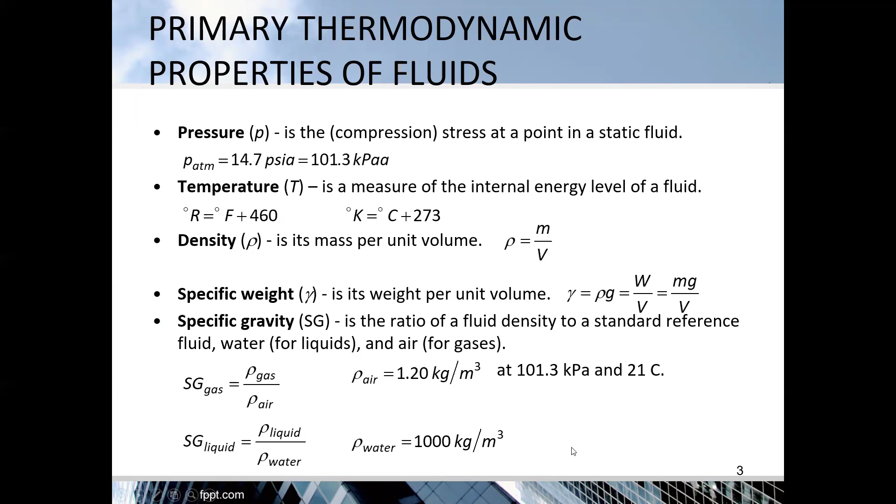Or, using gamma instead, gamma liquid over gamma water. Gamma water is 9810 Newton per cubic meter, or 62.4 pounds per cubic foot.

Sample number 1. At sea level, G is 32.2 feet per second squared. Find the specific weight in pounds per cubic foot of a liquid with a density of 65.5 pound-mass per cubic foot. Solution: gamma equals rho times G, that is, density in pounds per cubic foot, times G, over GC.

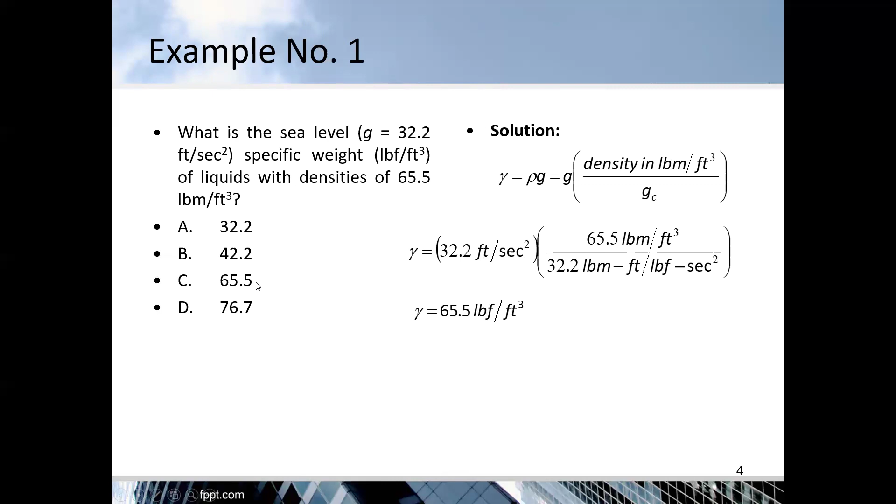Next, viscosity — this is review. Absolute or dynamic viscosity is the viscosity determined by direct measurement of shear resistance, in poise or centipoise. Units: 1 reyn is 1 pound-second per square inch.

1 poise is 1 dyne-second per square centimeter, or 0.1 Pascal-second. 1 centipoise, the common unit CP, is equal to 0.01 poise.

Kinematic viscosity is the absolute viscosity of a fluid divided by its density, in stoke or centistoke. Units are square feet per second, square meter per second; 1 stoke equals 1 square centimeter per second, or 0.0001 square meter per second.

1 centistoke, symbol cSt — small c, capital S — is equal to 0.01 stoke.

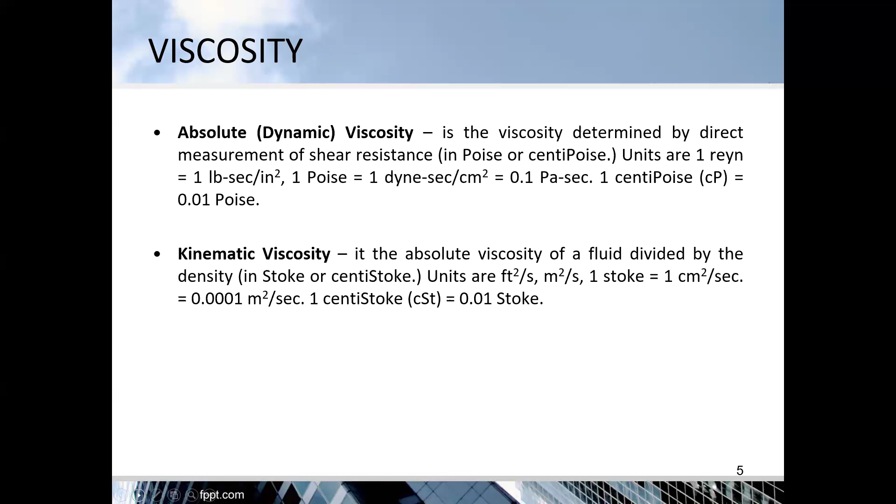Sample number 2: An oil has a kinematic viscosity of 1.25 times 10 to the negative 4 meters squared per second, and a specific gravity of 0.8. What is its dynamic, or absolute, viscosity in kilogram-meter-second units? So, kinematic viscosity is 1.25 times 10 to the negative 4 meters squared per second.

Required is the absolute viscosity, symbol mu. Mu equals rho times nu (the kinematic viscosity). You need the specific gravity, so density equals SG times rho of water. Thus mu equals SG times rho water times nu. That's nu, the kinematic viscosity symbol, distinct from mu, the absolute viscosity symbol.

So, mu is equal to 0.8 times 1,000 times 1.25 times 10 negative 4, or 0.1 kilogram per meter second.

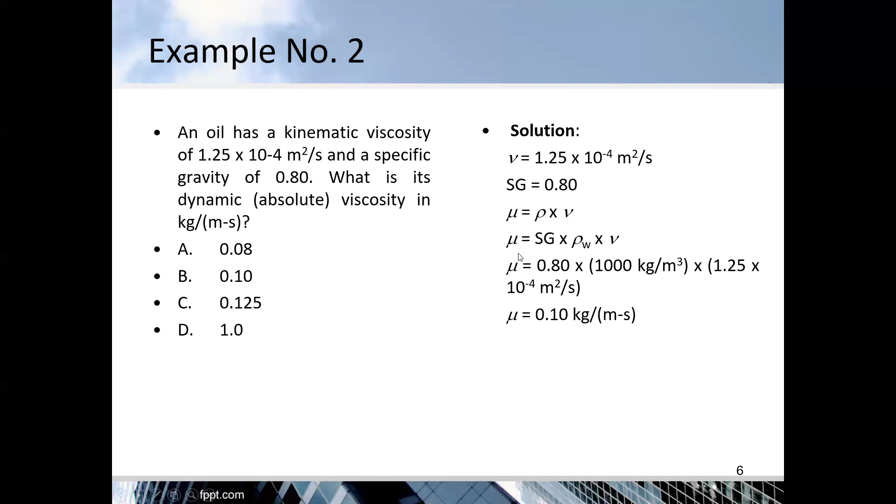Next is the Reynolds number. Reynolds number is a dimensionless number which is the ratio of forces of inertia to viscous forces of the fluid. It is the primary parameter correlating the viscous behavior of all Newtonian fluids. So Reynolds number is the forces of inertia divided by the viscous forces, or dV rho over mu, where R is the Reynolds number, dimensionless. D is the inside diameter in meters, V is velocity, nu is kinematic viscosity in meters squared per second, and mu is the absolute viscosity in Pascal second.

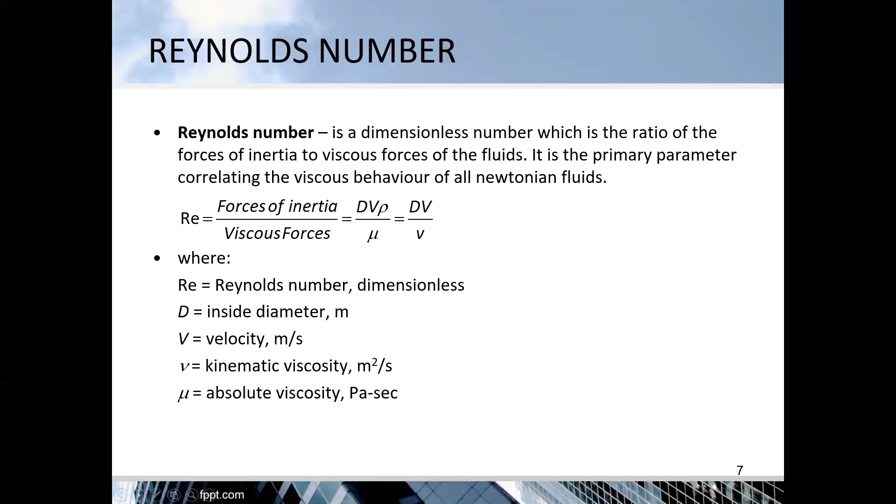So we get 1,000 times 2 times 12 over 39.37, times 11 over 1.131, equals 5930, letter B. Here 1,000 is the density, 11 is the velocity in meters per second.

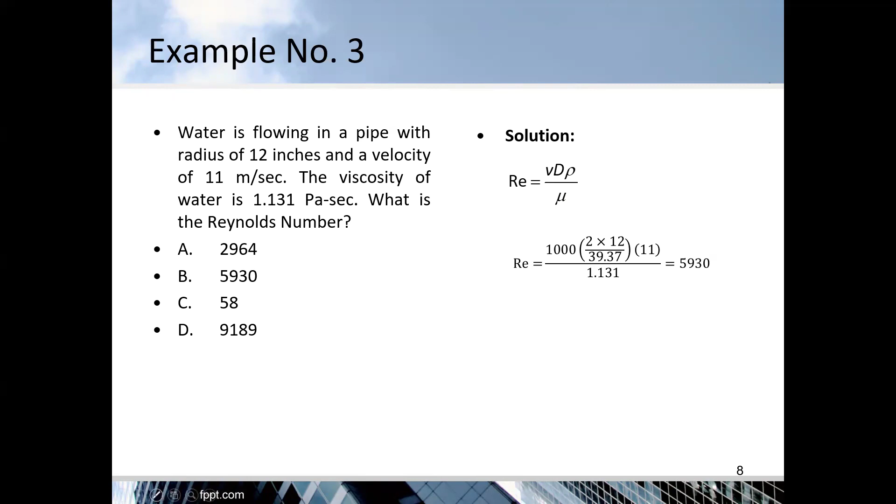So, hydrostatic pressure. Hydrostatic pressure is the pressure of fluid exerted on the walls of a container. Pressure is equal to weight density times height: P equals gamma h or rho g h. Pressure head is h, the height, which equals P over gamma or P over rho g. That's shown in the figure, where P is the hydrostatic pressure, gauge pressure, not absolute.

h is the height of fluid, the pressure head. Rho is the density of liquid. At the bottom, you have gamma of water times h. If it's water, at the top the pressure is 0 since h is 0. If absolute, you add atmospheric pressure.

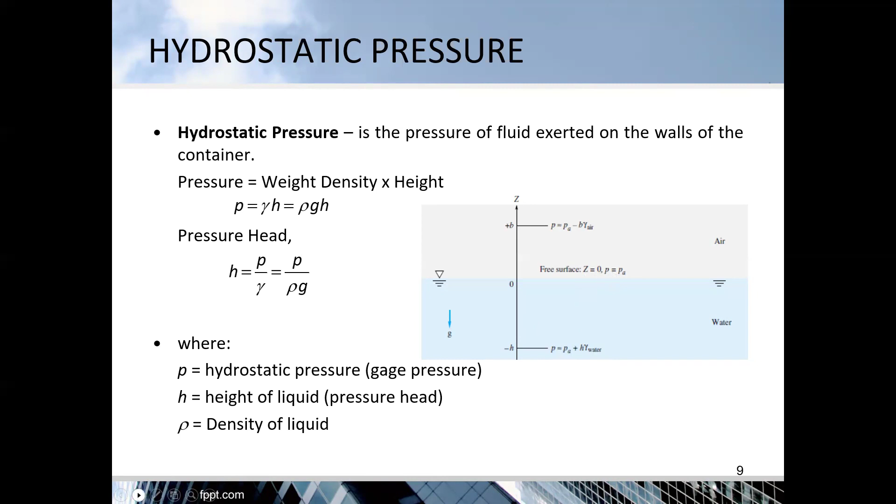Sample number 4: On a sea level standard day, a pressure gauge moored below the surface of the ocean, with specific gravity 1.025, reads an absolute pressure of 1.4 megapascal. How deep is the instrument?

P absolute minus P atmospheric equals rho g h, equals gamma h, equals SG times gamma water times h, because it's in the ocean.

The reading given is absolute, so 1.4 megapascal is 1,400 kilopascal minus atmospheric, which is 101.325 since that's the gauge pressure. So it becomes 1.025 times 9.81 times h. Solving, h is equal to 129 meters.

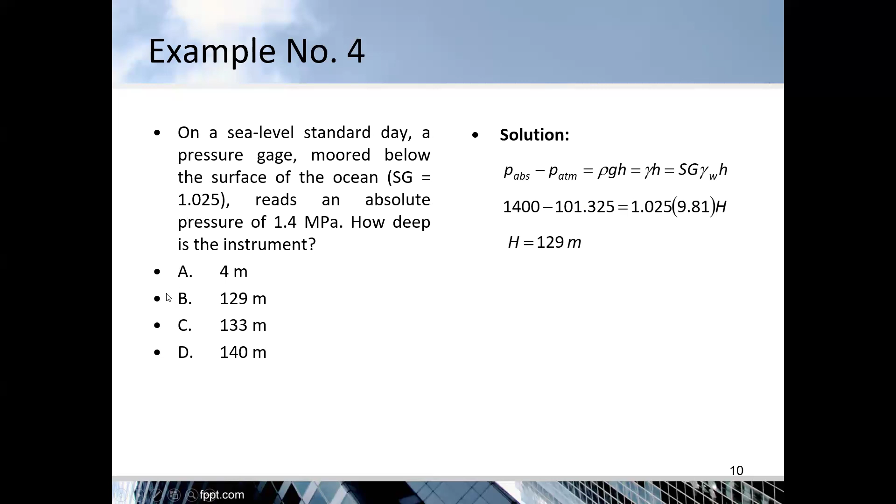Example number 5: If the absolute pressure at the bottom of the ocean is 300 kilopascal, how deep is the water at this point? Solution: absolute pressure equals Pg plus P atmospheric. So 300 equals Pg plus 101.325.

Here's another method of solving this, since problems 4 and 5 are essentially the same. P sub G is equal to 198.675 kilopascal. h equals P sub G over specific gravity times gamma, equals 198.675 over 1.03 times 9.81, which is 19.66 meters.

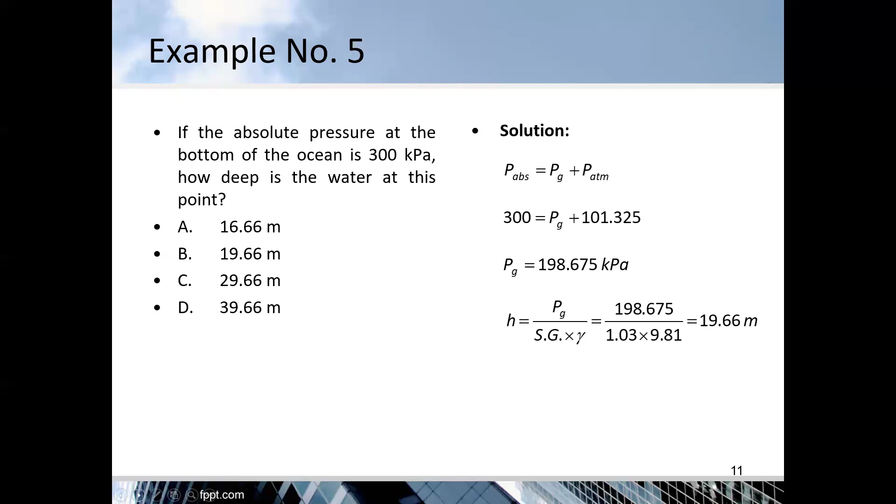Okay, next is the manometer, this part that can get confusing. A manometer is a device to measure pressure, or mostly the difference in pressure, using a column of liquid to balance the pressure. Here's an example of a manometer.

P sub B is equal to negative gamma 1 times (zA minus z1) — negative because it's going down. Then minus gamma 2 times (z1 minus z2), since we started here, C1 minus C2, and it opposes going up so it's minus. Then minus P2 and P3 terms: minus gamma 3 times (z2 minus z3), minus gamma 4 times (z3 minus zB), opposite direction again. This altogether equals P sub A minus P sub B.

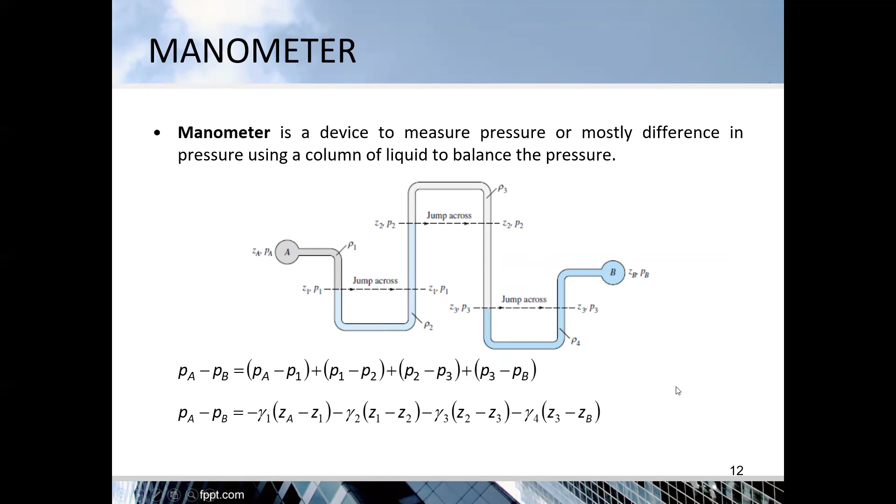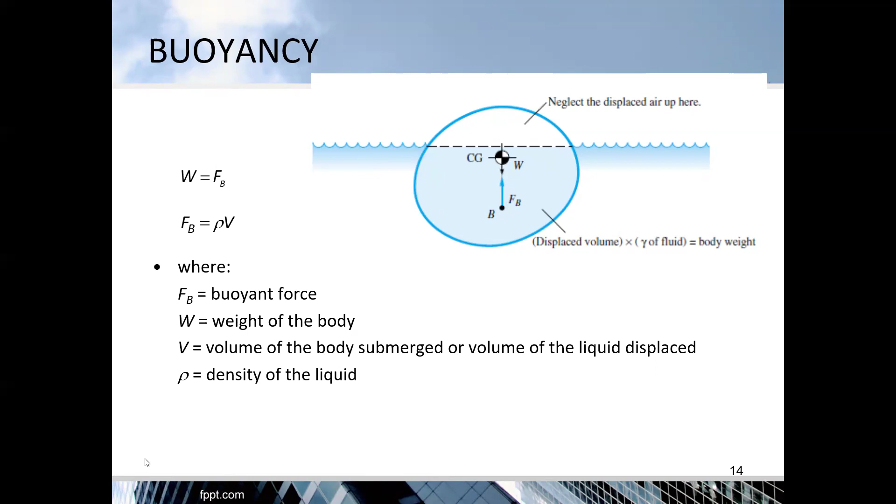Remember, example number 7. A stone weighs 105 pounds in air and 83 pounds in water. Find the specific gravity of the stone. So, solutions, the volume of the stone is equal to the volume of water displaced. Kasi yan yung total fully submerged to.

Yung isa picture is partially submerged. So the specific weight of the stone is equal to 105 over 0.352564 is equal to 297.82 pounds per cubic foot.

Saan galing tong 0.35? Wait, diretso natin. Specific gravity of the stone is 297.82 divided by 62.4 is 4.77.

Okay. So the specific weight of is 105. Ang record lang dito is by the specific gravity of the stone. So walang connection sa lubog. Kasi yung stone is ang weight is 105 divided by the volume. So the volume of the stone.

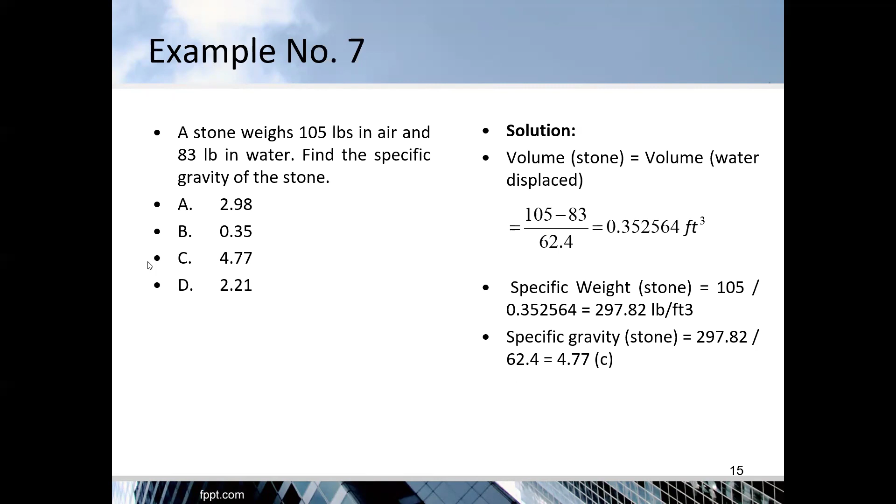Next, an iceberg has a specific gravity of 0.922. So when floating in seawater, a specific gravity is 1.03. Its exposed volume in percentage is nearest to. So yan, solution. Specific gravity of ice times volume of ice equal to specific gravity of sea times the volume submerged. So 0.922 times volume of ice equal to 1.03 times volume submerged. So the volume submerged is 0.895 of the volume of ice. So yung exposed mo is the volume of ice minus 0.895 volume of ice over volume of ice times 100% is 10.5%. So letter D.

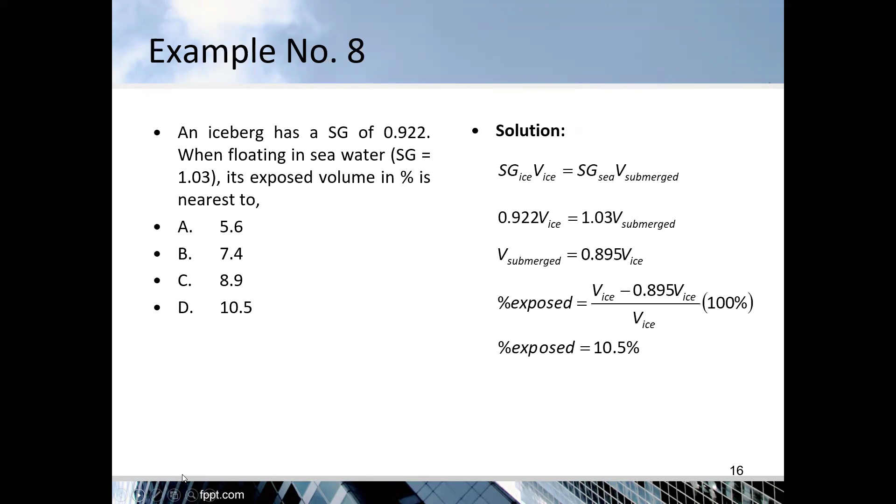Next, continuity equation. This equation is used to calculate the area or velocity in one-dimensional varying area flow, like flow in a nozzle or venturi.

The mass is constant, which is rho 1 times Q1 equals rho 2 times Q2, or rho 1, A1, V1 equals rho 2, A2, V2. For incompressible flow like water, rho is equal to rho 1 equals rho 2, so Q equals Q1 equals Q2, and A1, V1 equals A2, V2.

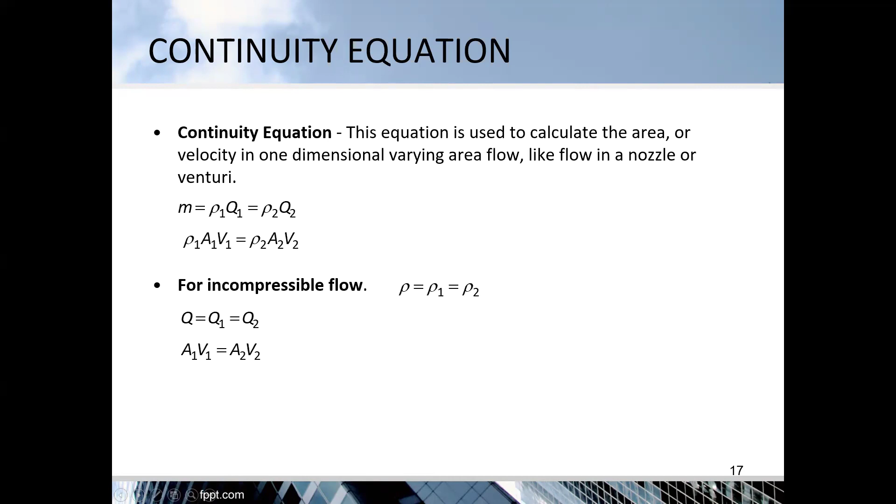Example number 9. Oil flows through a 30 tube condenser with a velocity of 1.75 meters per second. The internal diameter of the tube is 20 mm and oil density is 0.9 grams per milliliter. Find the volume flow in liters per second. Take note of your conversions.

Q equals AV, area times velocity. Q equals pi over 4 times 0.02 squared times 1.75 meters per second, which is 5.4977 times 10 negative 4 cubic meters per second. This is for 1 tube. For 30 tubes, Q equals 5.4977 times 10 negative 4 cubic meters per second times 1,000 liters per cubic meter, times 30 tubes. So it equals 16.5 liters per second.

So the answer is letter A. We didn't use the oil density because what's being asked is the volume flow rate, not the mass flow rate.

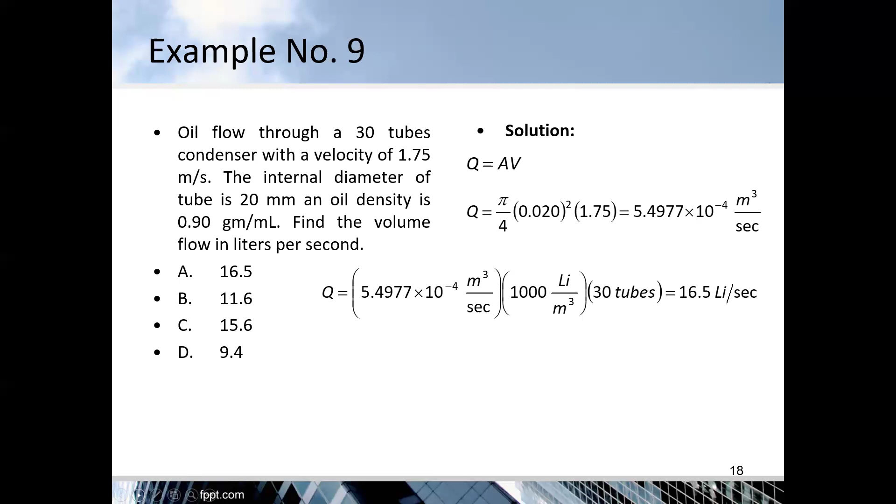Next, velocity head. This is called Torricelli's theorem. The velocity of a liquid which discharges under a head is equal to the velocity of a body which falls under the same head. H equals V squared over 2G, where H is the velocity head, and V is the velocity of the liquid.

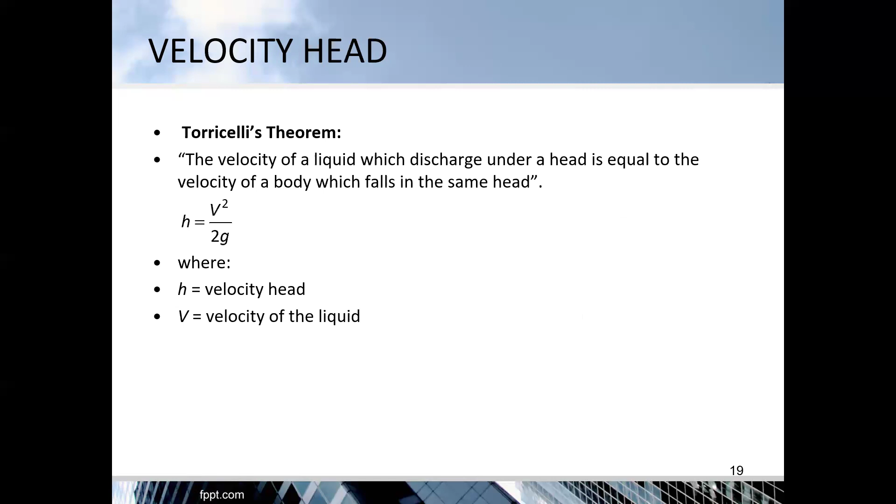Friction head loss in pipes. One formula is the Darcy-Weisbach equation. H of F equals FL times V squared over 2GD, or FL over D times V squared over 2G. This is the better form.

Let's define the ratio: HF is the velocity head in meters or feet. V is the velocity of the liquid in meters per second or feet per second. L is the length of the pipe in meters or feet. D is the internal diameter in meters or feet. F is the coefficient of friction, or friction factor, Darcy. G equals 9.81 meters per second squared or 32.2 feet per second squared.

There's also another friction factor that equals 2F or 4F of this one. This is called the Fanning friction factor.

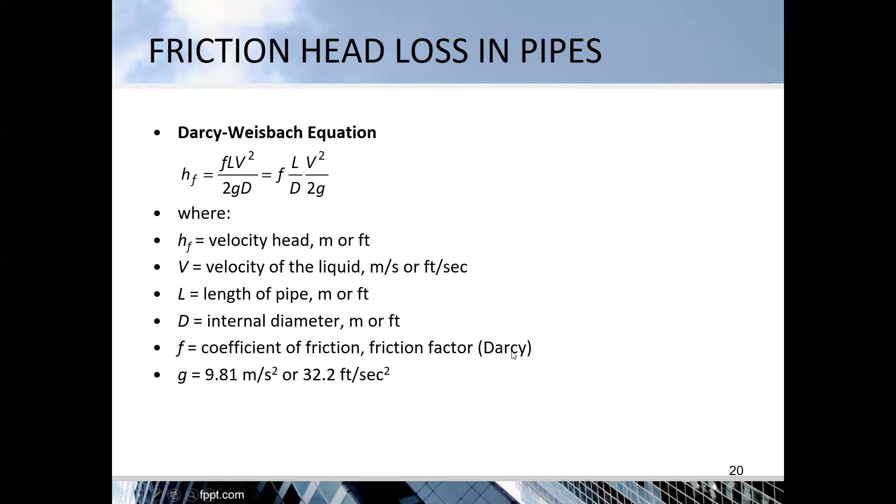Example number 10. What is the expected head loss per mile of a closed circular pipe 17 inches inside diameter, friction factor of 0.03, when 3,300 gallons per minute of water flows under pressure.

So V equals 4Q over pi D squared, equals 4 times 7.35243 cubic feet per second divided by pi times 17 over 12 in feet, squared, which is 4.6645 feet per second.

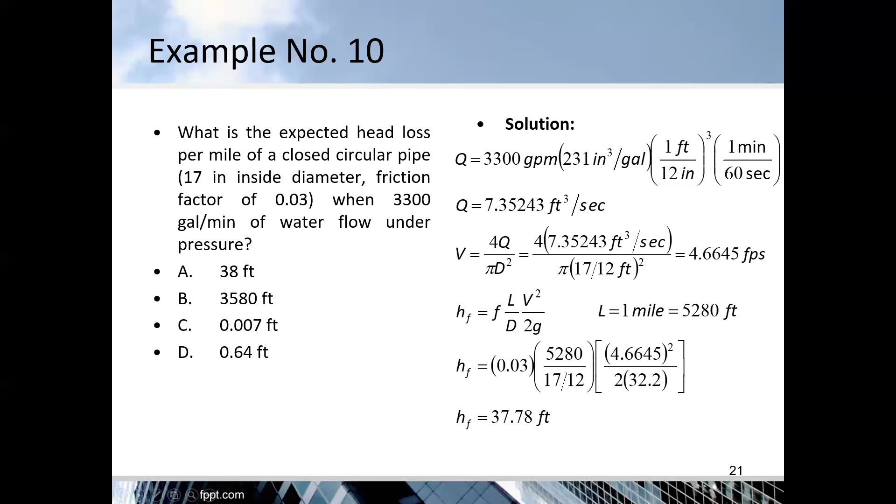Next, coefficient of friction, F. The formula for laminar flow, where the Reynolds number is less than 2,300, is F equals 64 over Reynolds number. For laminar and turbulent flow, check your notes. B is the coefficient of friction for turbulent flow.

We also have the Colebrook equation, for turbulent flow only, where Reynolds number is greater than 2,300. F equals negative 2 times log of (2.51 over Reynolds number times F to the 1/2, plus E over D over 3.7). This requires trial and error.

Where E is the nominal roughness of the pipe being used. This is the Colebrook equation. There are other equations too, some with F, and some without F at all, but they have certain ranges of Reynolds number where they apply.

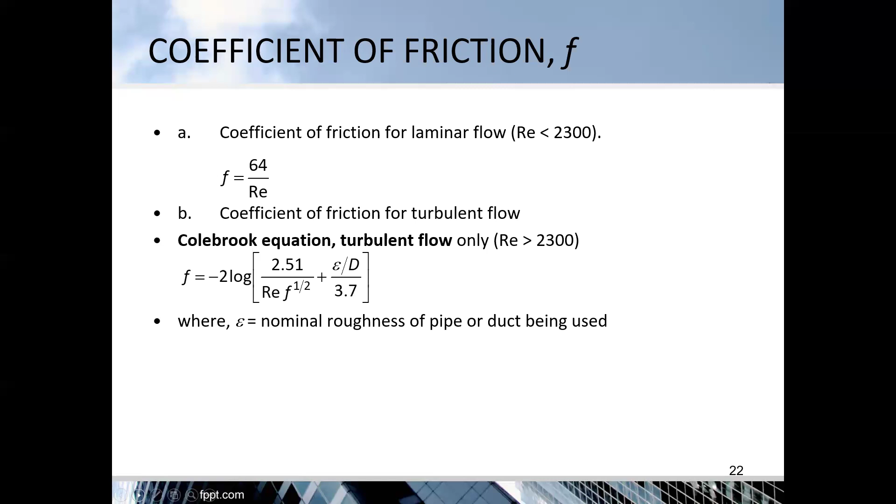Ito. A good approximate equation for the turbulent region of the Moody chart is given by Haaland's equation. F is equal to negative 1.8 log of 6.9 over Reynolds number plus E over D over 3.7, exponent 1.11, then ito naman, yung buong yan is exponent negative 2.

Meron tayong isa naman na Blasius equation for a Reynolds number of 4,000 to 10 exponent 5 or 100,000. So F is equal to 0.316 over the fourth root of the Reynolds number.

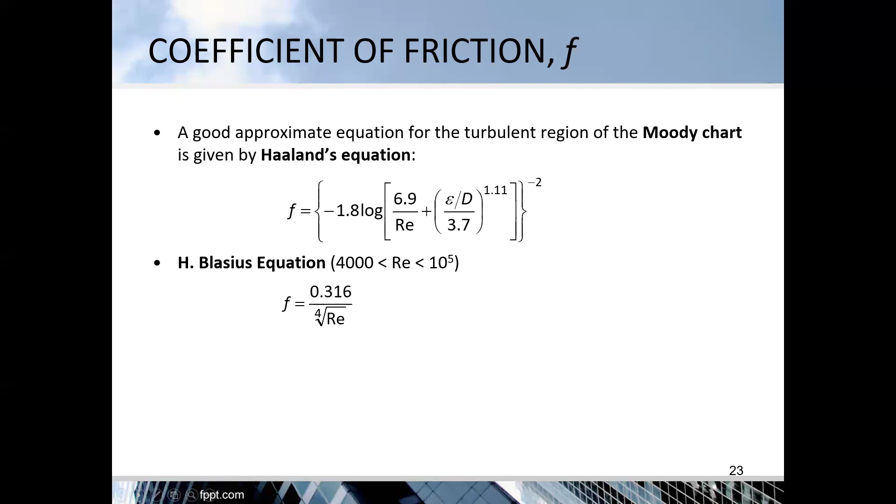Example number 11. For flow of water at a Reynolds number of 1.03 times 10 exponent 6 through a 5 centimeter diameter pipe of roughness height 0.5 mm, the approximate friction factor is...

Using Haaland's approximation, yung friction factor sa ngayon. F is equal to negative 1.8... Hindi kasi pwede yung Blasius, dahil 1.03 times 10 exponent 6 ang Reynolds number. So negative 1.8 log of 6.9 over Re plus E over D over 3.7, exponent 1.11, then negative 2. Substitute values, F is 0.038. So letter C.

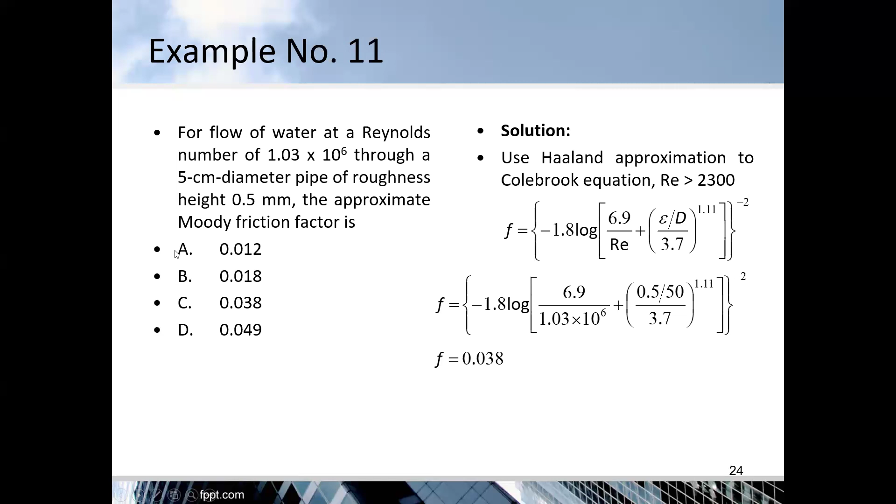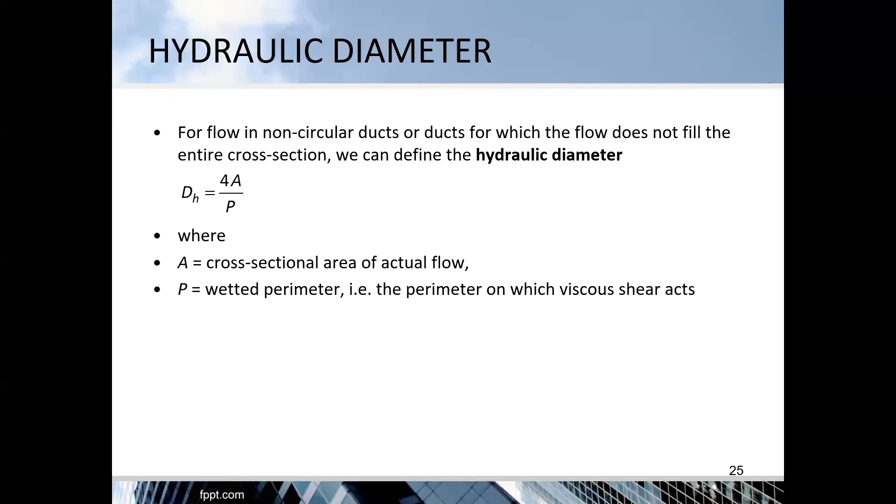Next, hydraulic diameter. Pag hindi bilog yung duct mo o yung pipe, for flow in a non-circular duct, commonly sa ducting yan, or ducts for which the flow does not fill the entire cross-section. So we can define the hydraulic diameter, DH equal to 4A over P, where A is the cross-sectional area of flow, P is the wetted perimeter, that is the perimeter on which viscous shear acts.

Example number 12. Air at atmospheric pressure and with a mean velocity of 1 meter per second flows inside a square section duct of side B equal to 4 centimeters. If the air temperature is 350 K, determine the Reynolds number. At 350 K, viscosity is equal to 20.76 times 10 negative 6 meters squared per second. Ang required is the Reynolds number.

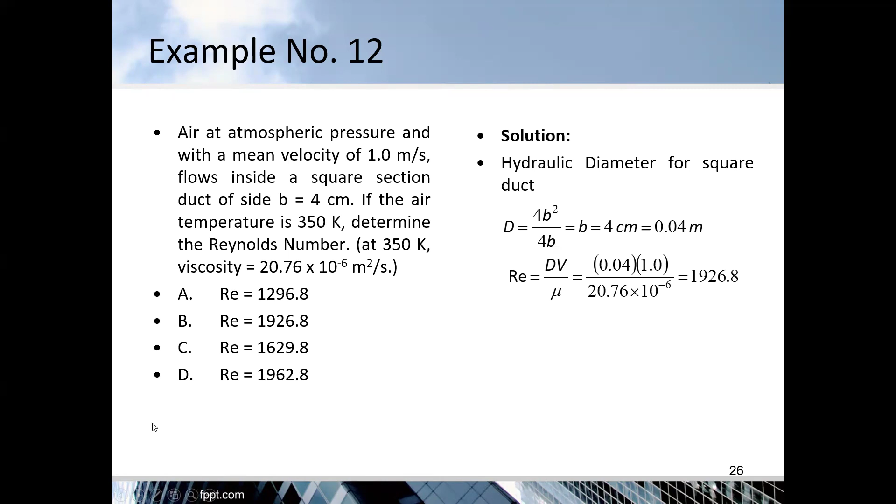So we have the hydraulic diameter for a square duct, D is equal to 4B squared over perimeter, yung area di ba, 4A over P. Perimeter is 4B, so D is equal to B, which is 4 centimeters or 0.04 meter. So the Reynolds number is DV over mu, equal to 0.04 times velocity 1 meter per second, divided by 20.76 times 10 to the negative 6, is 1926.8. So letter B.

Example number 13. What is the hydraulic diameter of a rectangular air ventilation duct whose cross-section is 1 meter by 25 centimeters? So again, hydraulic diameter is 4A over P. We have 4 times 100 centimeters times 25 centimeters, divided by 2 times 100 plus 25 centimeters, yun yung perimeter sa baba. That is 40 centimeters. So letter B.

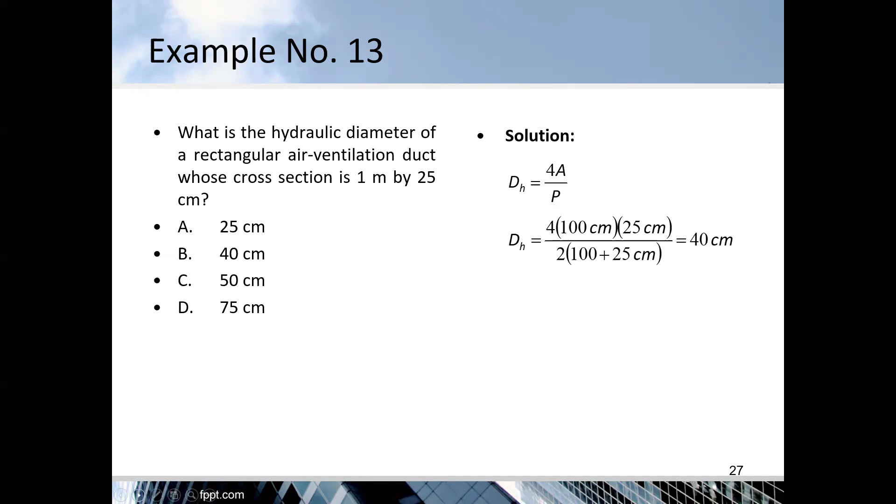Next is the Bernoulli's equation. Nasa fluid mechanics pa rin tayo. Bernoulli's equation is a general energy equation that is used for solving fluid flows. It relates elevation head, pressure head, and velocity head. Some conditions of using Bernoulli's equation: 1, no fluid friction; 2, fluid is incompressible; and 3, negligible changes in thermal energy. So pag may condition na yan, that is a Bernoulli's equation.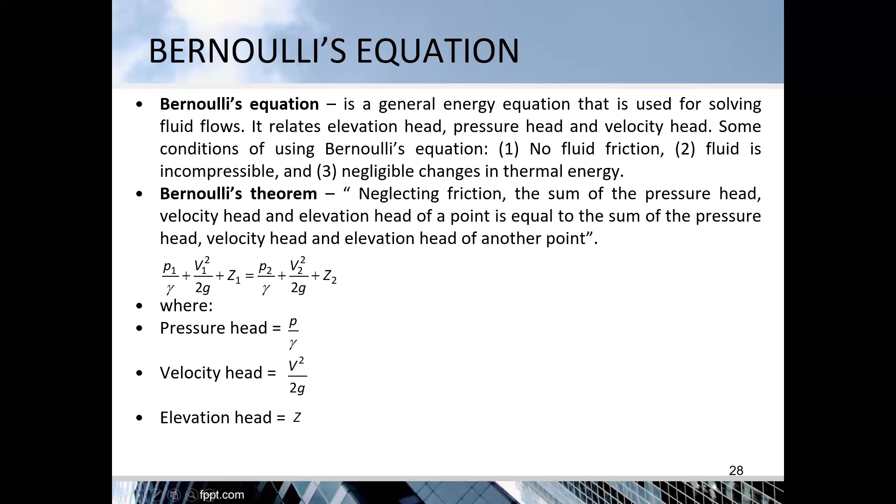Bernoulli's theorem: neglecting friction head, the sum of pressure head, velocity head, and elevation head at a point is equal to the sum of the pressure head, velocity head, and elevation head at another point. So P sub 1 over gamma plus V sub 1 squared over 2G plus Z sub 1 is equal to P sub 2 over gamma plus V sub 2 squared over 2G plus Z sub 2. Pag hindi Bernoulli, ang tawag doon is energy equation. So pressure head is P over gamma, velocity head is V squared over 2G, elevation is Z, for point 1 and point 2.

Example number 14. Water flows to a horizontal pipe of cross-sectional area of 20 centimeters squared. At one section, the cross-sectional area is 4 centimeters squared. The pressure difference between the two sections is 29.4 psi. So how many cubic meters of water will flow out of the pipe in 1 minute?

Okay, conversions naman. So P sub 1 over gamma minus P sub 2 over gamma is equal to V sub 2 squared minus V sub 1 squared over 2G. Ito yung equation niya, kasi horizontal pipe, wala yung Z1 minus Z2, is equal to 0. Okay, so Q is equal to A1 V1 is equal to A2 V2, so 20 V1 is equal to 4 V2, so V2 is equal to 5 times V1.

Then meron tayong V sub 2 squared minus V sub 1 squared over 2G is equal to P sub 1 minus P sub 2 over gamma. But P sub 1 minus P sub 2 is equal to 29.4 psi. Convert mo to kilopascal: 101.325 kilopascal divided by 14.696 psi is 202.705 kilopascal. So 5V, substitute mo na dito. Hanap kasi natin is yung velocity. So 5V1 squared minus V1 squared, over 2 times 9.81 meter per second squared, is 202.705 over 9.81.

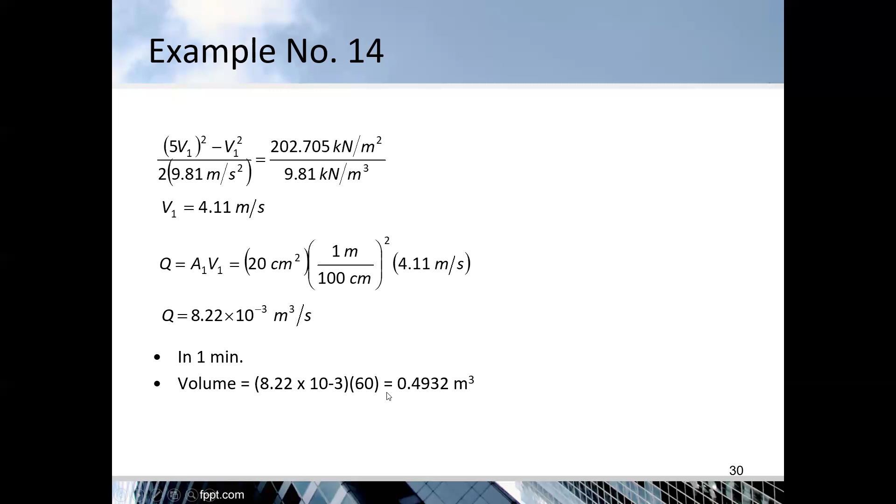So V sub 1 is equal to 4.11 meters per second. Then Q is equal to A sub 1 V sub 1, which is 20 centimeters squared times 1 over 100 centimeter, squared so that we get cubic meter, times 4.11 meter per second, giving 8.22 times 10 negative 3 cubic meter per second. In 1 minute, the volume is 8.22 times 10 exponent negative 3 times 60, which is 0.4932 cubic meter. So the answer is either C. Okay, example number 15.

A venturi, a perfect venturi with throat diameter of 1.8 inches is placed horizontally in a pipe with a 5-inch diameter. 80 pounds of water flow through the pipe each second. What is the difference between the pipe and the venturi static pressure?

Solution: Q is equal to 80 pounds per second divided by 62.4 pounds per cubic feet, the density of water since it's flow. Water flow is 1.28205 cubic feet per second. Then V1 is 4Q over pi D1 squared, which is 4 times 1.28205 divided by pi times 5 over 12 squared, equals 9.4024 feet per second.

V sub 2 is equal to 4Q over pi D2 squared, which is 4 times 1.28205 over pi times 1.8 over 12 squared, equals 72.5492 feet per second.

Then P sub 1 minus P sub 2 over gamma is equal to V sub 2 squared minus V sub 1 squared over 2G. The required value is P1 minus P2. So P1 minus P2 times 144, since PSI is the answer, that's the conversion, divided by 62.4, is equal to 72.5492 squared minus 9.4024 squared over 2 times 32.2. So P1 minus P2 is 34.82 PSI. The answer is letter B.

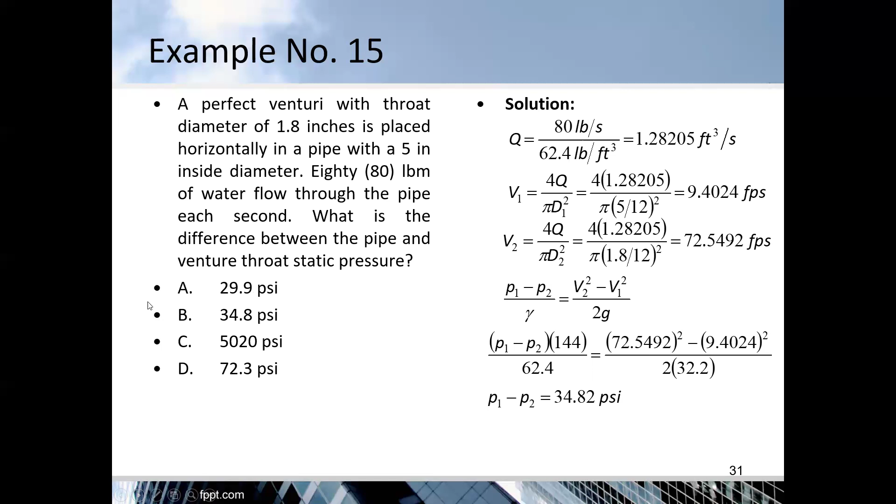Next, venturi, nozzle, and orifice meter. These are the three obstruction type meters commonly used for the measurement of flow through a pipe.

So the flow rate Q is equal to A2 over the square root of 1 minus A2 over A1 squared, times the square root of 2GH. This equation needs a modifying coefficient, as viscous effect and boundary roughness, as well as the velocity of approach factor that depends on the diameter ratio, have been neglected.

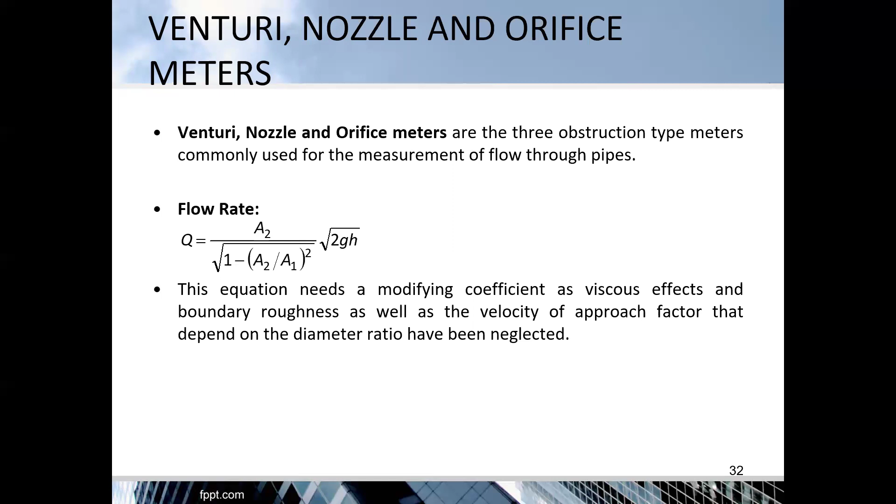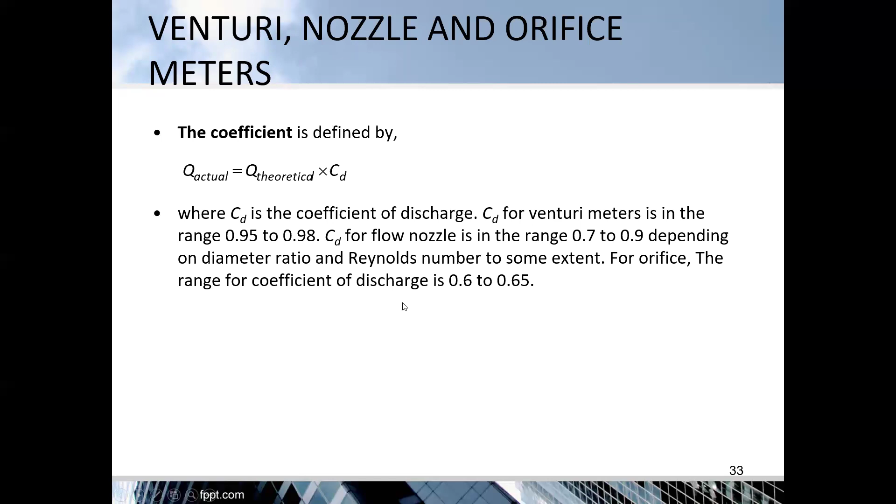The coefficient is defined by Q actual is equal to Q theoretical times CD, where Q theoretical is the one discussed earlier. CD is the coefficient of discharge. CD for venturimeter is in the range of 0.95 to 0.98. CD for flow nozzle is in the range of 0.7 to 0.9 depending on the diameter ratio and Reynolds number to some extent. For orifice, the range for coefficient of discharge is 0.6 to 0.65.

And discharge measurement using orifice: the actual flow rate, Q actual, is equal to, for orifice, CD times AO times the square root of 2GH, where AO is the area of orifice and CD is the coefficient of discharge. CD is equal to Q actual over Q theoretical.

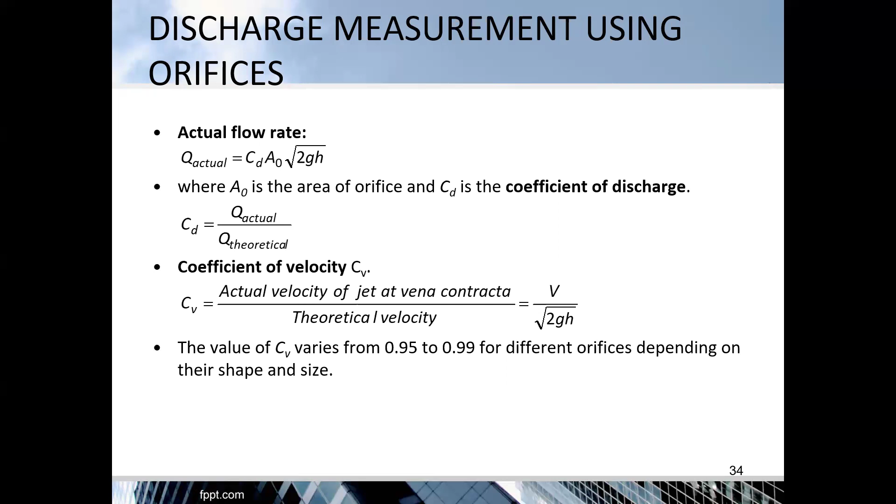Coefficient of velocity, CV: CV is equal to actual velocity of jet at vena contracta divided by theoretical velocity. Vena contracta velocity is equal to V over the square root of 2GH. The value of CV varies from 0.95 to 0.99 for different orifices depending on their shape and size.

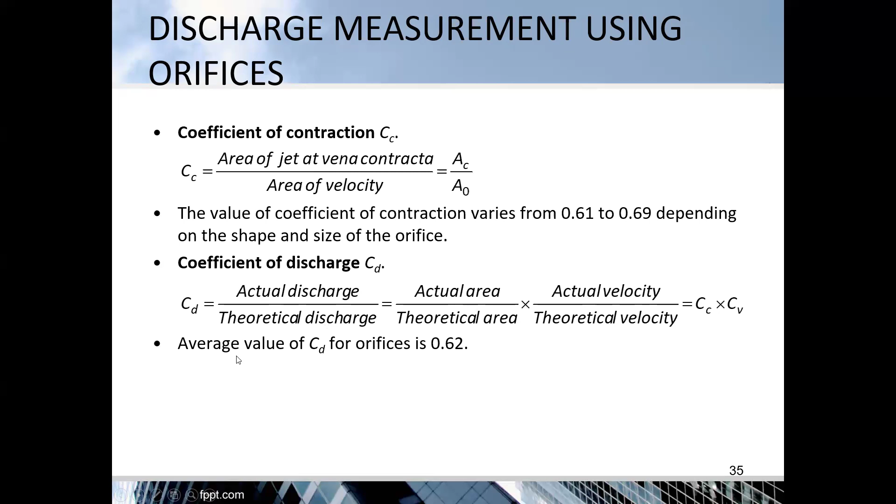Coefficient of contraction, CC, is the area of jet at vena contracta divided by the area of orifice, equal to A sub C over A sub O, where area of A is the area of velocity or discharge. The value of coefficient of contraction varies from 0.61 to 0.69 depending on the shape and size of the orifice. So coefficient of discharge, CD, is the actual discharge divided by theoretical discharge, or actual area divided by theoretical area times actual velocity divided by theoretical velocity, equal to CC times CV. Average value of CD for orifices is 0.62.

Example number 16. Let's pause here.

Example number 16: Calculate the discharge in liters per second through a 5-inch diameter orifice under a head of 7.6 meters of water. Assume coefficient of discharge of 0.65.

The simple equation is Q is equal to CA times the square root of 2GH, where C is 0.65, times the area, pi over 4 times the 5-inch converted to meters, that is 5 times 0.0254, squared, times the square root of 2 times 9.81 times 7.6. So Q is equal to 0.1006 cubic meter per second, times 1,000, that is 100.6 liters per second.

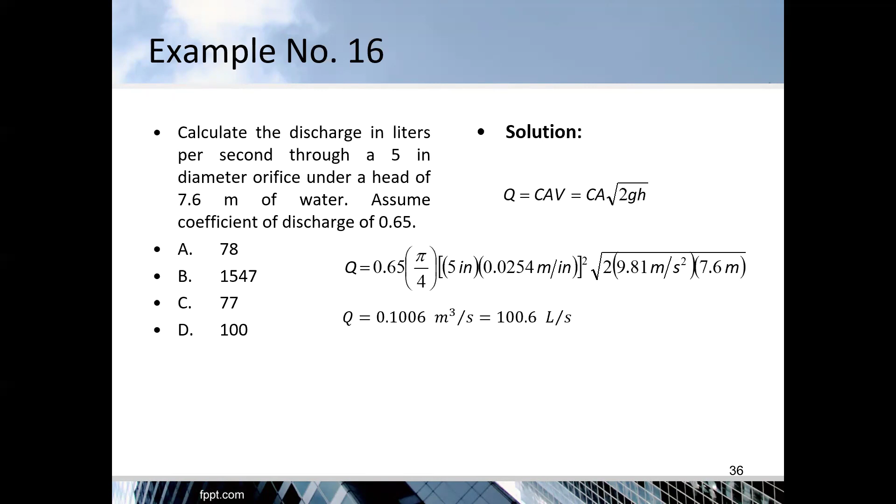So, here it is: 100.6 liters per second. So the answer is letter D.